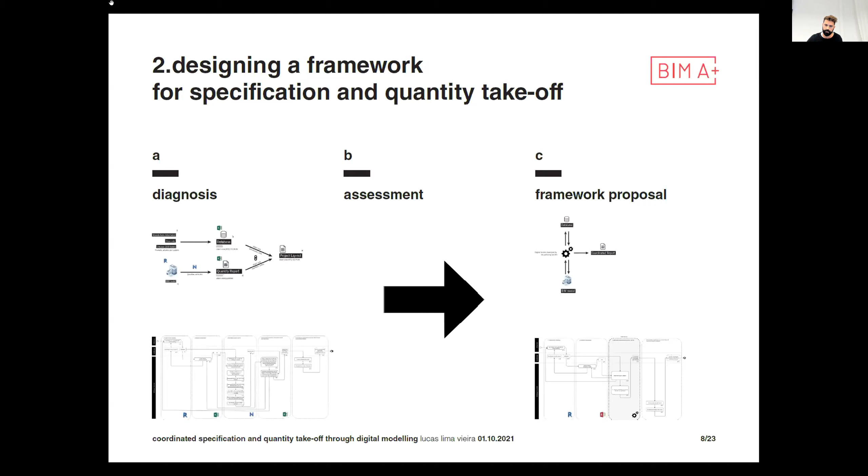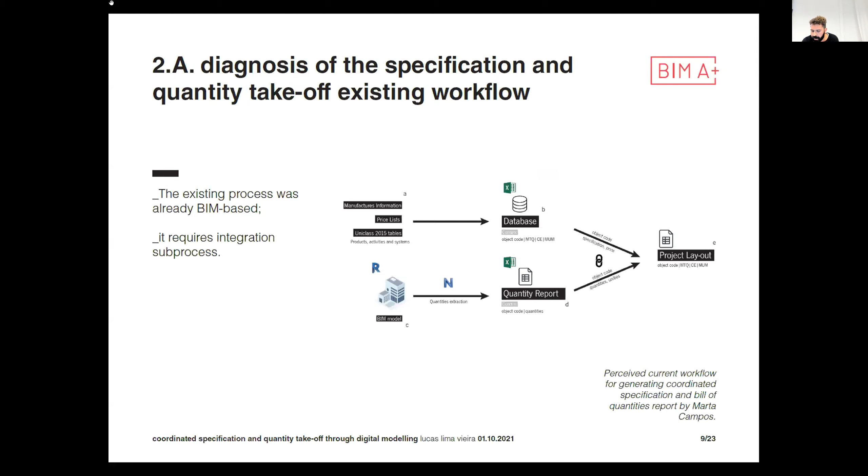From the diagnosis, it was reported that even though they already performed BIM-based specification and quantity takeoff at Marta Campos, their existing workflow still requires some integrations to be processed in order to convert the output information to be useful in the following step. This integration process was done mostly manually or semi-automatically. So after the diagnosis, an assessment was made of the as-is process that identified the strengths and weaknesses, indicating what issues should be addressed to enable the development of the digital solution further.

Here, I highlight the fact that they already had a specification database and an object library in compliance with NBS standards and Uniclass 2015 classification system, respectively. And these two factors were fundamental for the intended automatization. On the other hand, many different platforms and steps require integration to be processed to shape the data to be used as an input for the following action. The information is not synchronized in the involved platforms, and sometimes this information was scattered in different sources and gathered by hand in the final coordinated report.

The classification codes used by Marta Campos have a suffix which provides deeper levels of classification, complementing the Uniclass 2015 code. However, this suffix was inconsistent since there was not a clear pattern for them, which would mean some obstacles for machine reading. Lastly, the specification database was built and managed in a tool which is not adequate for the purpose. And instead of a relational database management system, the data was stored in a spreadsheet.

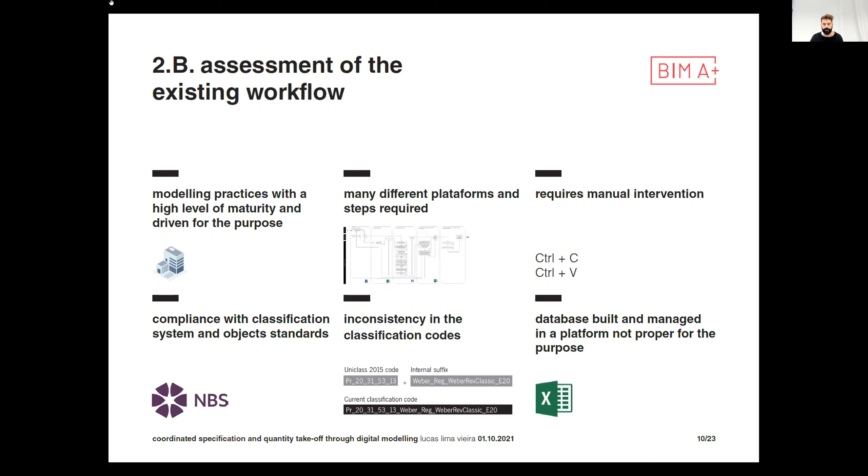In response to the addressed issues, modelling problems were addressed. In the case of Marta Campos, most of them were related to objects and activities which do not have a graphical expression in the BIM model, but that needed to be expressed in the coordinated specification and quantity takeoff report. So the workflow was developed aiming to decrease the number of required steps and the mitigation of manual and semi-automatic interventions.

Also, the classification code inconsistency was approached by standardizing the suffix used to classify the object activities in higher levels of classification. And lastly, a proper relational database management system was implemented, establishing a new structure for it with new tables and queries. A graphical user interface was also created for managing the stored data. And after concluding the framework proposal, the programming stage began.

And the digital solution was written in IronPython language, plus XAML language for some specific graphical user interfaces, used to receive some user inputs. And it relied on Revit API and PyRevit library to establish the connections between the scripts and the BIM model. The digital solution works as an add-in of the authoring tool, and it's divided into two modules. The first one performs the check and validation of the BIM model, and the second generates the report itself.

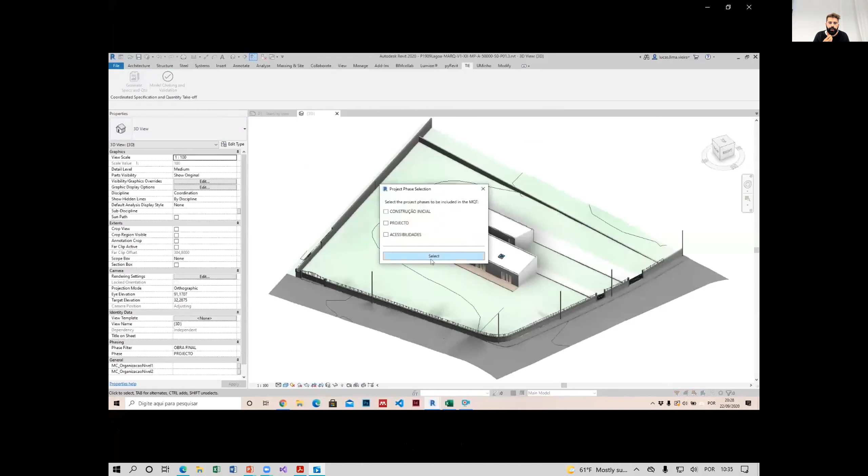So here is the database management system. Some graphic user interface was created to manage the data, the construction specification data. And here is the authoring tool. So the add-in is already in action. So you are filtering by types and now phases. And the script is being executed, extracting the quantities from the BIM model.

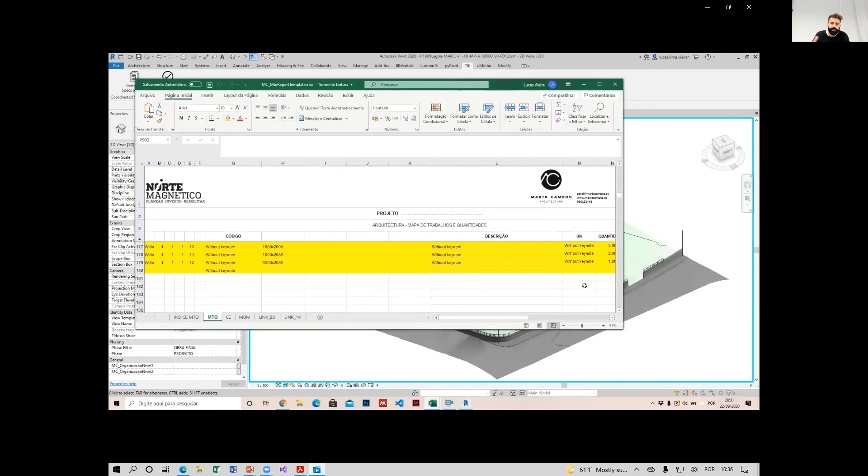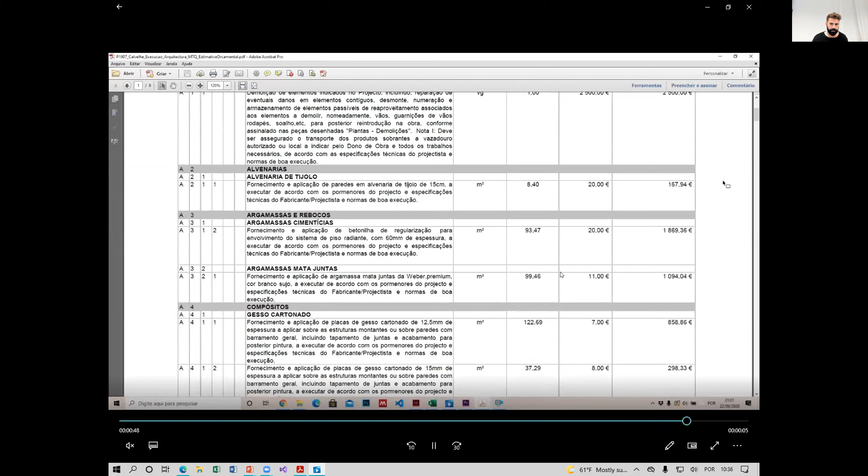And also at the same time coordinating it with the construction specification database, putting all the information together in order to make the report, which is a project deliverable here in Portugal. So here is the final report, comprising all the architectural elements of the project.

So coming back to the presentation, the final stage of the methodology was the testing and validation of TIE in real case scenarios. This step was important to identify errors and necessary adjustments in both the framework and in TIE scripts. And for this stage, two ongoing projects at Marta Campos were selected. The first one, Project A, was a new single-family house construction in an early design stage.

This choice was made since the BIM model could be driven from the very beginning of the design process to attain the intended purpose of producing the coordinated specification and quantity takeoff report, also setting up a preliminary cost estimation. Besides, as a new construction, the script would not have to deal with complexities such as reuse, restoration, demolition interventions, giving me the opportunity to focus only on the core functionalities of the scripts. And once these main functionalities were consolidated, project B was used for testing and validating.

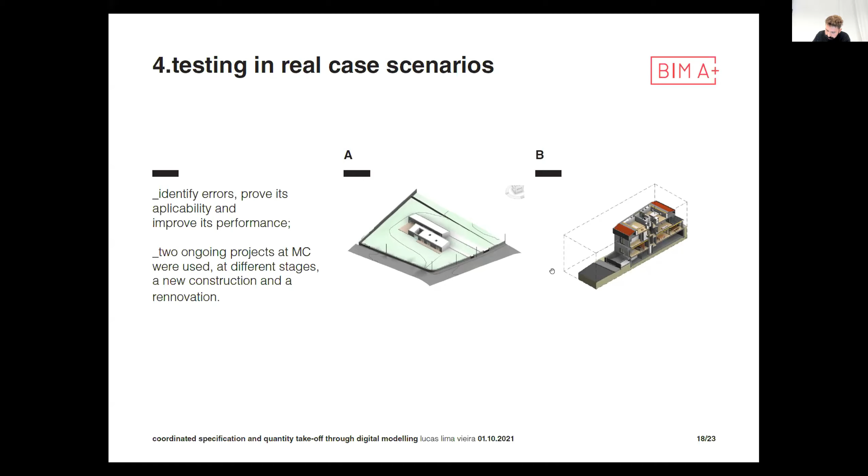The project already had all construction drawings about to be issued, which would not allow the atelier to make significant adjustments to drive the model to be used by the digital tool. Furthermore, as a renovation, the scripts would have to deal with the complexities of reusing, restoring, and demolishing activities. In the end, the modeling adjustments required by the framework were incorporated into the BIM model without significant spending of resources. The mentioned interventions were measured correctly, consolidating the script, which performed the process successfully.

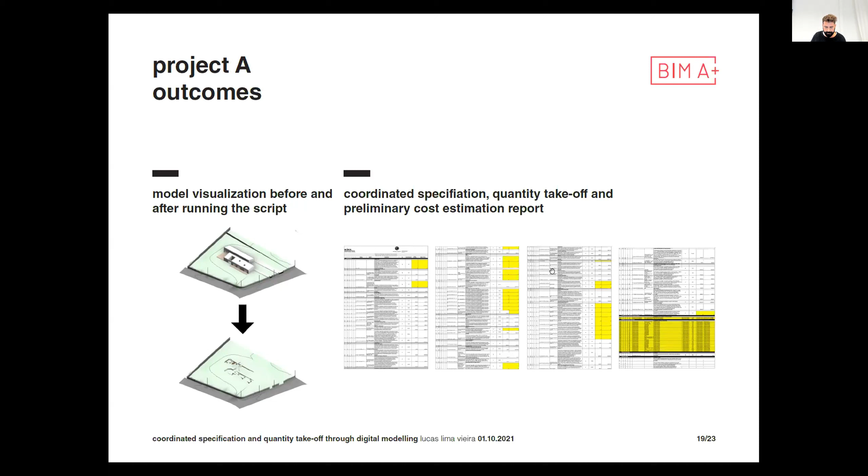And so to conclude, here are the final results of the work development. The time to produce the coordinated specification and quantity takeoff report, setting up a preliminary cost estimation by Marta Campos, has decreased. The already BIM-based method used to take 5 days to be completed, including the modeling adjustments needed for the process. And now with the re-engineered process, it took just 1 day. The comparison was made using project B, considering projects with similar scale and complexity, and one person performing the task.